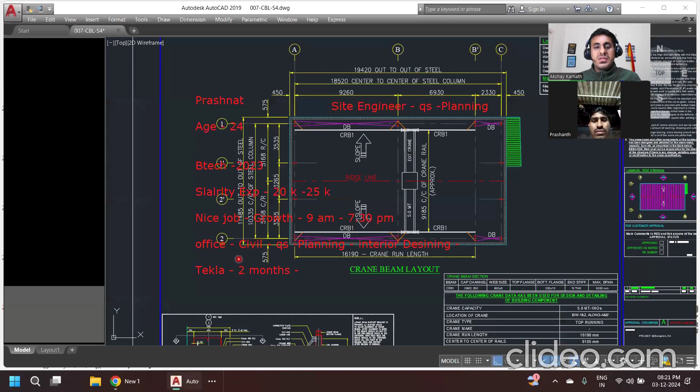Tekla job and all, what happens - there's a structural engineer, so what will happen? I'll tell you a simple idea, what they do in Tekla. Same thing I'll show you here, I'll remove all these things. It's a steel structure only. See, this kind of drawing a draftsman is going to prepare. Now for this particular drawing, how the model will look, how it will look in 3D, for that I'll show you here - Tekla.

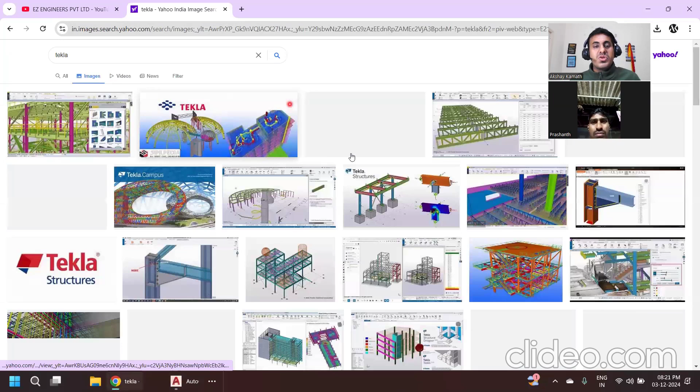So in Tekla, you're going to do such kind of models. You're getting my point? Yes sir, this kind of model you will be doing. But now, what should be the size of this pedestal? Let's say if this is the pedestal, what should be the size of the pedestal?

Then let's say if this is this thing, what do you call it? This is a flange, this is the top portion, we call it a flange. This middle portion is called the web. The bottom is called flange. Again, this is web, this is flange.

What should be the thickness of that? What is the length of this? All these things will be decided by the structural engineer. He will apply the engineering knowledge there.

If you are a modeler, he will give you an input. He will prepare such kind of drawings, rough drawing he'll prepare and give you. I'll show you one drawing, normal drawing I'm showing you. Let's say if you're working in any company, this structure engineer will prepare some rough sketch and give it to you like this. Now, being a modeler, you sit and do such kind of modeling jobs.

You will not decide whether I should provide an 8mm flange or whether I should put a 10mm flange. You will not decide, that is already decided by the structure engineer. But if you like such kind of jobs, if you're okay with this kind of job and happy doing such kind of modeling, you can enter this job.

There is scope also, because end of the day, for construction projects nowadays a lot of steel structures are happening, and nowadays people want these 3D models. In Tekla, we use all these things to do this. You can do that, it's a good job also, an office job.

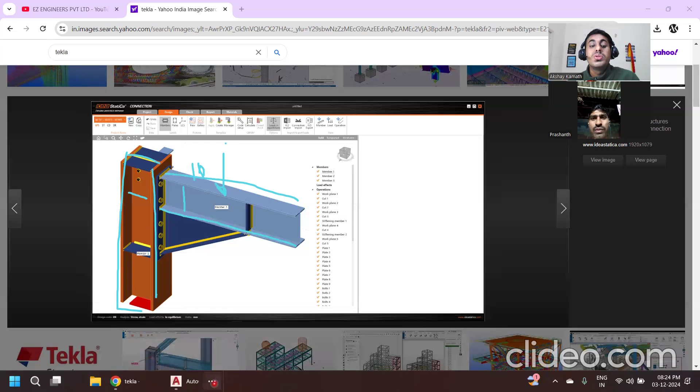Because what will happen, let's say you worked on the site for some time. I'm not telling you to work lifelong, but at least if you work for one year, tomorrow if you want to start your own consultancy, that knowledge will help you. You can help people prepare a plan, help people do the construction work, take the contracts, do the executions. That can be done. With a Tekla model, you cannot do that.

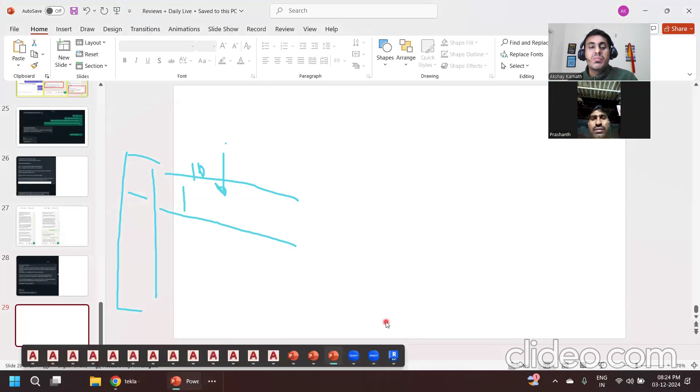In Tekla model, no. If you like, you're from which place? Telangana, you told? Telangana sir. So in Telangana, in your place, if somebody wants to do house construction, nobody requires Tekla for that. House construction, we are doing RCC. If you're doing RCC, you should know how to prepare such kind of plans, right? Simple, you should know how to prepare such kind of plans.

You don't do all this thing. For that, even AutoCAD is also sufficient. In AutoCAD, if you know how to prepare the plan, if you know Vastu layout, you can prepare such plans. And if you learn structure designing, you can do such kind of plans. You don't require any Tekla for that.

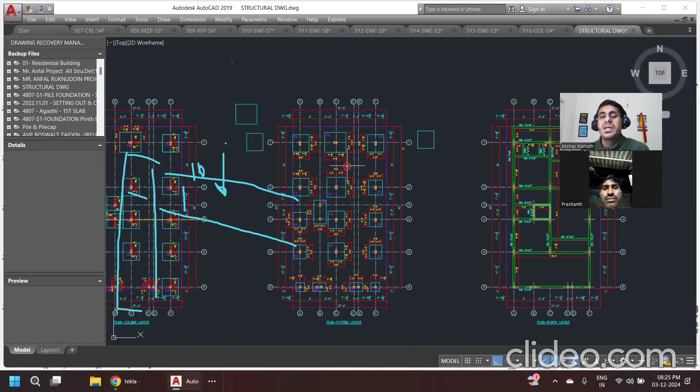Tekla is only required for steel structure work. What else do you know? So it's not required.

My suggestion would be to work as a site engineer in Hyderabad, Telangana. How far is Hyderabad for you? I can go, sir. If I need to work in Hyderabad, I'll go to Hyderabad.

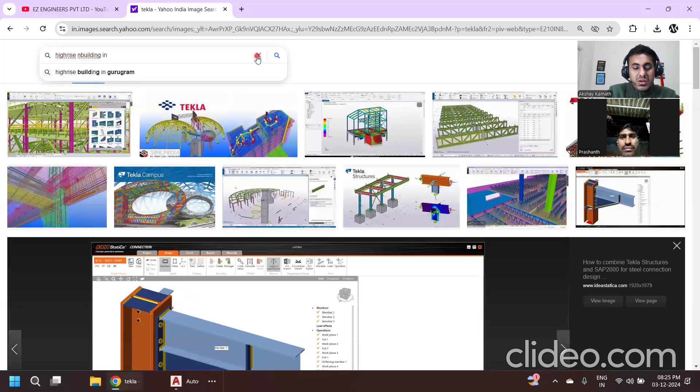I'll tell you, there's a podcast of mine in Hindi on the channel. There's a student who is 20 years of age, working in Hyderabad as a site engineer for a G+17 story building. There are a lot of high-rise buildings in Hyderabad.

He is getting 15,000, but you can get a salary of 20,000 also. Just imagine working on such a huge project as a site engineer.

But this requires 2 to 3 years, because to complete such a project, 2 to 3 years is required. You're still young, not like me at 30, 31. If I say a site job is hectic, it's okay, because I'm married, I have kids, I have to spend time with my family and all.

But since you're not married, at the age of 22, 23, 24, you can take risks in your life. Just imagine if you complete such projects for 2 to 3 years, the amount of knowledge you'll get - complete structure knowledge, mechanical, electrical, plumbing knowledge, interior knowledge, landscaping knowledge - every knowledge you're going to get.

Once you get all this knowledge, you can apply for abroad jobs as a site engineer. You can even get into a quantity surveying job. So these are the options you have. You can look for such jobs also.

That can be done. But my suggestion would be, in Tekla, you don't require all this engineering knowledge - it's not at all required in Tekla. If it's steel structure, a little bit of knowledge helps, and if you know to read the drawing, you can become a Tekla modeler.

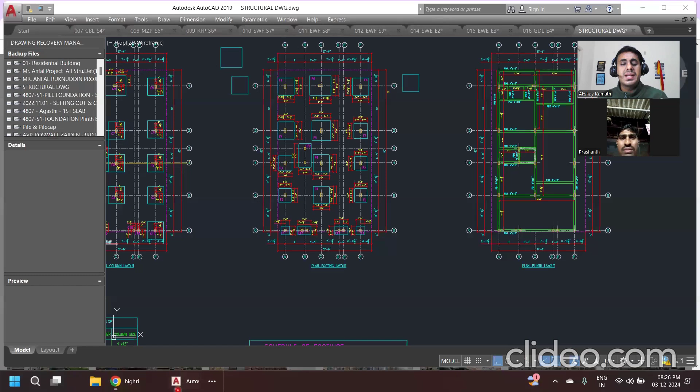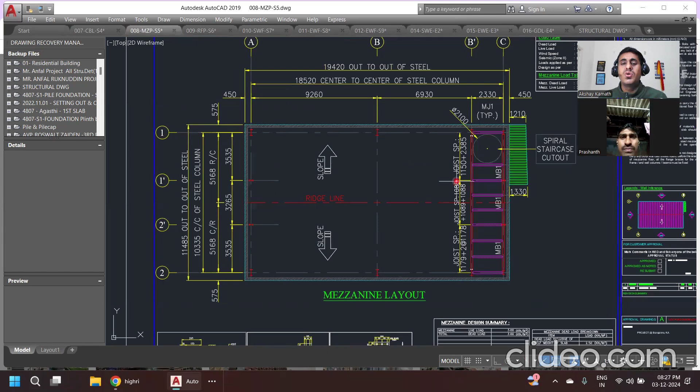But at the end of the day, you're doing modeling. You will never decide why these 4 bolts are given, why the spacing is 80, 60 - you will never decide all these things. It's already decided by the structure engineer. So the engineering knowledge doesn't come into this.

But if you work on site, your engineering knowledge is important here. You studied cement, concrete technology, BMCT, RCC subjects and all - everything is useful here. Work here for 1 or 2 years.

After that, you can go for a quantity surveying job, planning engineer job also - those things also can be done.

There's one podcast of mine - I think your video will come after some time, before your video one more video will come. There's a student who is 20 years of age, he also had the same problem. He's working as a site engineer. You watch that podcast - next week that video will come, after that your video will come.

In that, I've told him how, suppose he's working on such a big project - what happens when we become a site engineer? What do we do? We just look after the civil work only. We never think about how the mechanical, electrical, plumbing works are done.

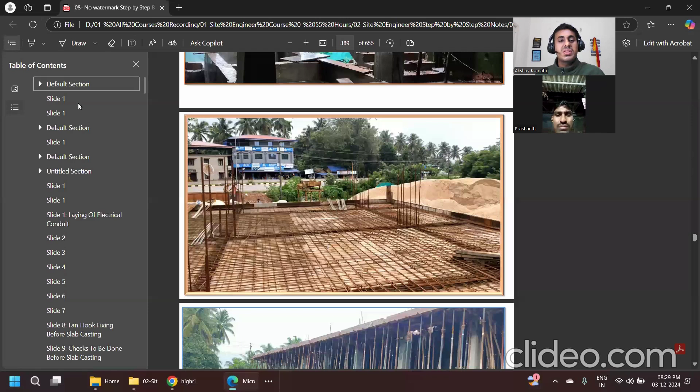In the same way, if any work is going on - for example, I'll tell you in 1 minute - when you're working as a site engineer, what happens? We usually focus on the completion of a particular slab.

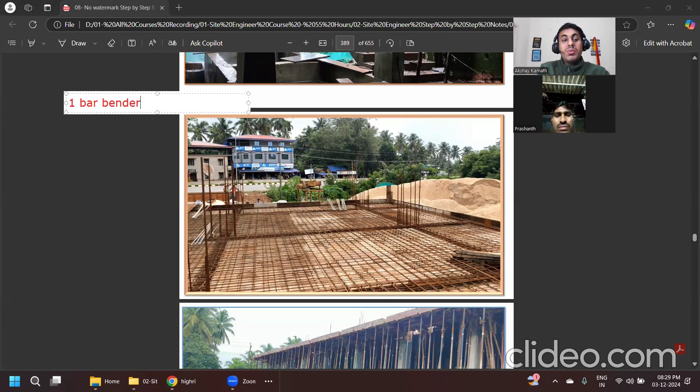But along with that, if you try to understand - if I put one mason, one barbender and one helper, how much work do they do? These things I'll explain. If you note down all this, you learn the productivity also.

Once you learn the productivity, tomorrow you can even go for planning jobs also. Here you can see all the applications.

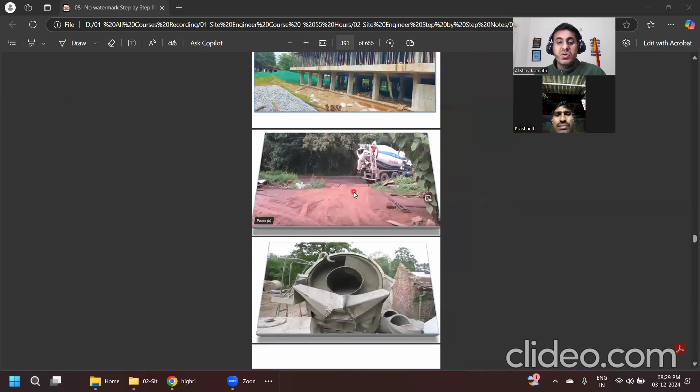I'll tell you what is the application of engineering. You studied one-way slab and two-way slab, no? Yes, in college you studied one-way slab, two-way slab and all, no? Yes sir, yes sir. See, all those are the application of this.

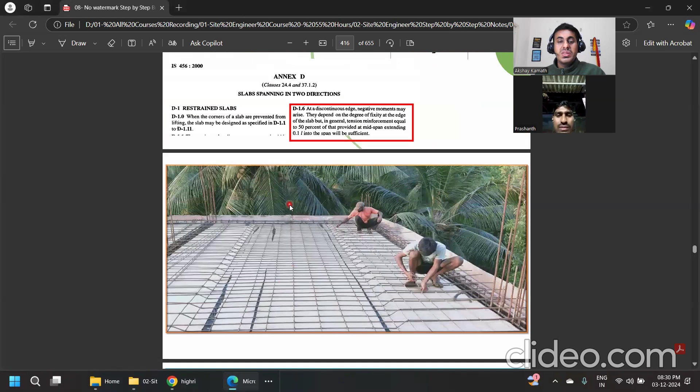Now I'll show one small application here. So what is the application of engineering? You studied that this is your fixed support - here it will be fixed. So when the load comes, this slab will try to lift from this side, then it will go down here. Wait, I'll take a different color.

This slab will try to lift from here, and it will try to go down here. Again, it will try to lift here. So you have a negative bending moment here, a negative bending moment here, and a positive bending moment here. Since you have a negative bending moment, your slab is trying to lift. That is why we provide this kind of bar, called a crank bar.

So you studied this in engineering, and you are putting the application of that. Just imagine if you learn all these things and try to implement them on site, you can become a good site engineer. You can go for planning engineer jobs and all.

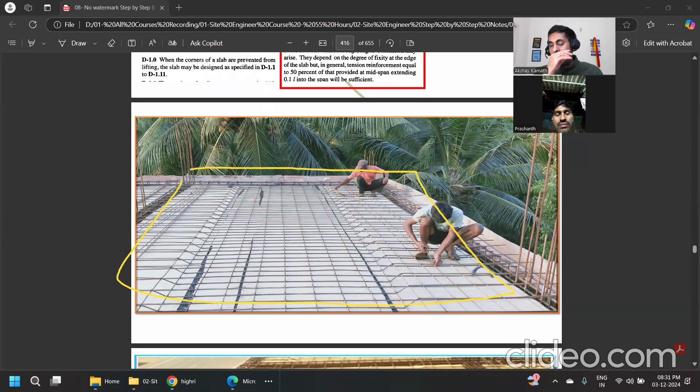But unfortunately, people think that being a site engineer means just standing near the slabs, watching how the work is done, and then complaining that the whole day they're speaking only with laborers. That is not the role of a site engineer. But if you think in this direction—how much steel is being put for two guys, how much steel has been put for the entire slab—and try to understand all these things, you can become a better engineer. But unfortunately, we are not learning those things.

In the same way, I'll tell you one more example. Let's say you're working on the site. Okay, this is the entire plan, and this is the layout of this thing.

If you're working on the site, we'll never think about this. Tell me, in this entire column layout, which column will get the maximum load? The column which is at the center will get the maximum load. What is the reason? Very simple. Because on this column, half of this slab load will come, half of this slab load will come. Let's say if there is a slab here, half of the slab load from here and half of the slab load will come. This entire area's load will come on this particular column.

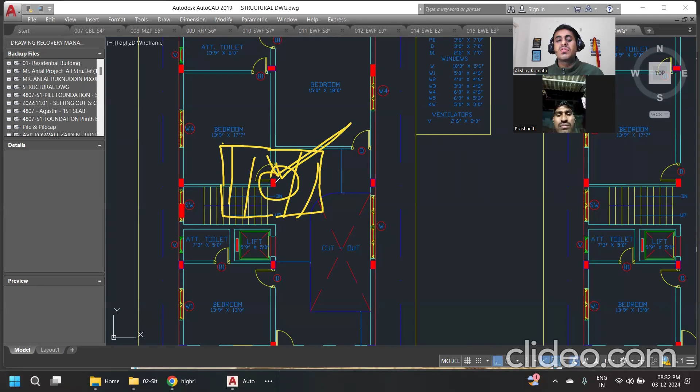So being a site engineer, even before I check the drawing, I know that the reinforcement and size of the column will be more here. And practically, if you try to correlate, you can see the same thing in the drawing also. If I open the column drawing, you'll see this particular column will have a bigger size only. Got it? You should think in this direction. This is a quality of a site engineer.

But if you don't think in this direction, what will happen? You just say, sir, footing is there, sir, column is there, C1, C2, C3 column, 9 by 9, 9 by 12, 9 by 15. This is what we do.

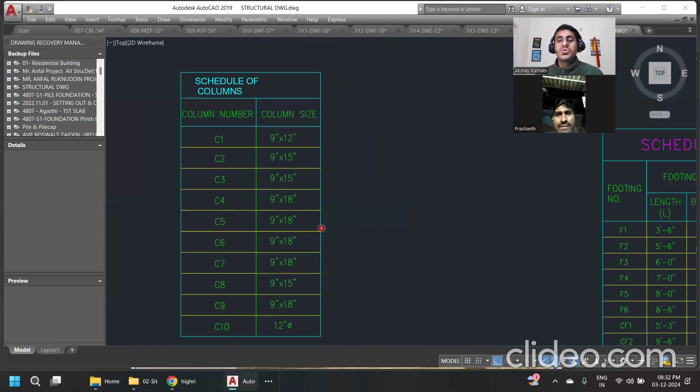So if you learn all these things and implement them, first you work as a site engineer, then go for a quantity surveyor field, go for a planning engineer field and all. That also can be done. Apart from that, you can even go for a BIM field. BIM field is also good, but again, the same thing—engineering knowledge is not required there. But if you like 3D modeling and tools like Tekla, if you like such kinds of jobs, you can go for it, no problem.

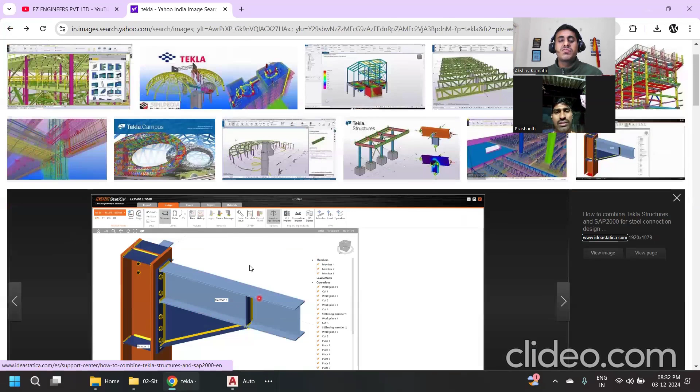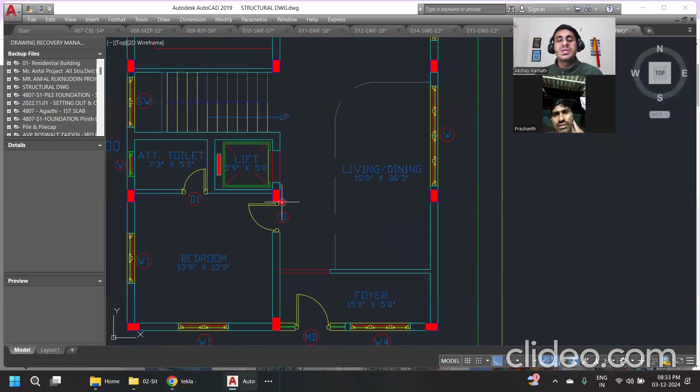But after doing this job, if you say you want to start your own consultancy, and somebody comes to you saying, Prashant, this is the plan I have, tell me whether the column sizes they put are correct or not—what will you do? You cannot answer, because you're not working in that field. You are a Tekla modeler. You will not know whether the column size should be like this or not, whether the column should be oriented vertically or horizontally. You don't know the typical column sizes for residential buildings and all. If you want this kind of knowledge, it's better to work on site than go for QS, planning and all.

But if you don't want such kind of knowledge, go for this job, no problem. Okay sir, a few days back I attended something.

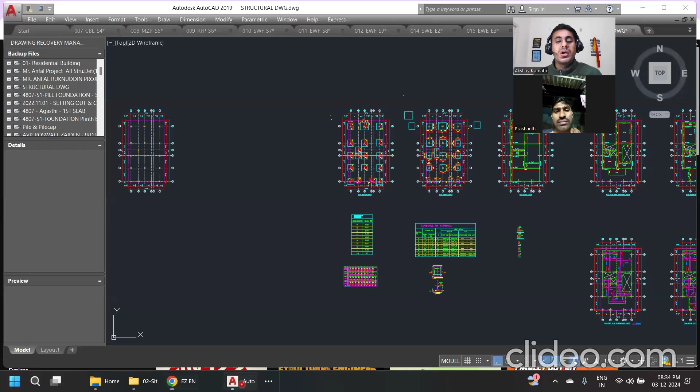People who are working as AutoCAD draftsmen and all, if they want to go for a better position, if they learn Tekla, if they learn BIM and all, that will be more helpful to them. That will be better. But for someone, even if you're working as a Tekla modeler, if you don't know to read such drawings and all, what will modeling do? Simple, no?

Correct, sir. If you're working as a Tekla modeler, this course is there. No, this is my course on steel structure. I have a course on PEB also, pre-engineered building. So if you work on the site for 1 year, I'll tell you one good way of getting into Tekla. You can enter into Tekla.

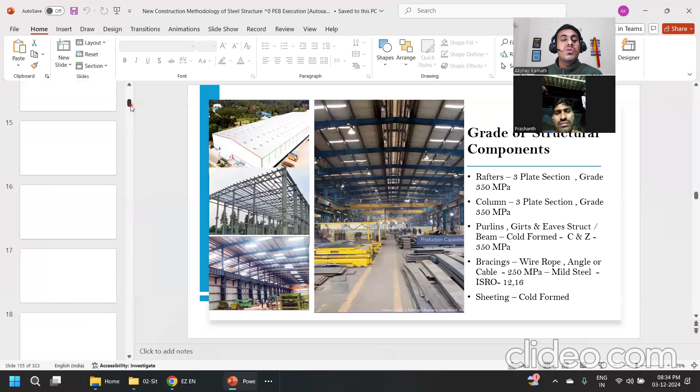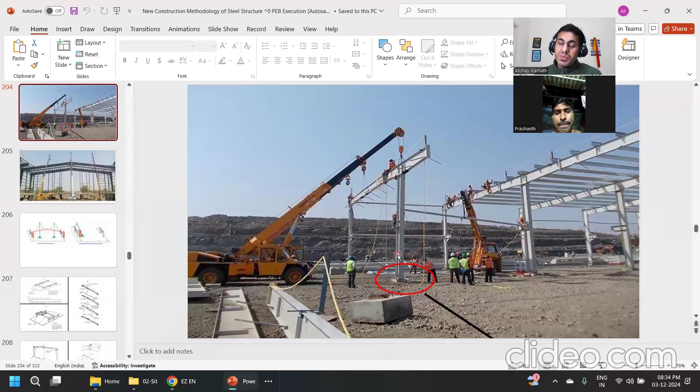Let's say you worked for 1 year as a PEB engineer on the site. You learned how to do the entire execution of these pre-engineered buildings and such kind of buildings, and you'll do in Tekla modeling. All these are your steel structure. Then if we enter into the Tekla field, okay, you do. That is also a good option, no problem.

Because sometimes if you get frustrated towards a site job, then you have an option of QS planning and all. If you don't want that either, you enter into the modeling field, it's okay, I don't have problem. That is a good field because I already worked as a site engineer. A good site engineer, if he learns the modeling part and all, he can become a good modeler. He can lead a team also tomorrow.

That also can be done. Yes sir. Okay, that way you can plan. But if you want Tekla, you learn it. But that training institute is of no use, paying them 30,000 rupees as commission and all is of no use. Nonsense it is.

So you have taken my construction methodology course, no? Yes sir. Okay fine, you finished that. Apart from that, there are other courses in my app. You can download my Civil Brains app. In December, we are running an offer, instead of 8,000, we'll be giving it for around 7,000, somewhere close to 6,999.

From December 15, I'll run the offer here only for the first 100 students. If you're interested, not just this course, you go and decide what you want to do, based on that I'll tell you. Because if you want to start your own consultancy and all, then this will not help you too much, then you have to learn AutoCAD and all. But tomorrow, if you want to work as a site engineer and then become a QS planning and all, then this is good. If you have any aim or plan of working abroad?

No sir, no, you don't have. Then you don't have to learn this MS Project, Primavera and all. But if you're going for a planning job, you should learn. Otherwise it's not required.

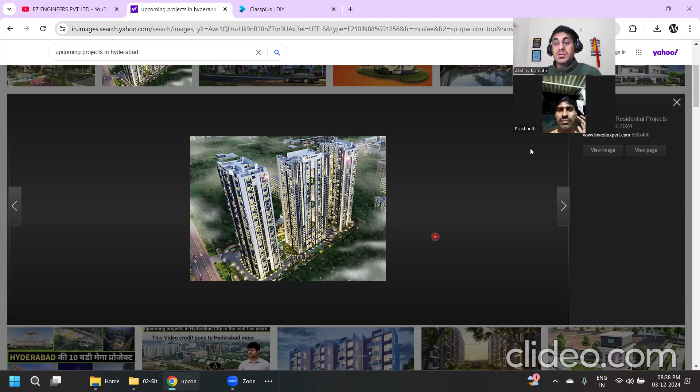And MIVAN is something which is booming nowadays. MIVAN shuttering. Whatever I'm teaching is the frame structure. In my same course, in future after February, I'll add MIVAN also in this.

So MIVAN also, if you learn, you have good opportunities in MIVAN construction. Very few engineers are there in MIVAN. You can go for all these MIVAN constructions only. Upcoming projects in Hyderabad, if I put MIVAN, this is MIVAN technology. MIVAN means MIVAN technology, we're using those. All these are your MIVAN.

You can work, but it won't be an easy job. That's what I'm telling. Site execution job will not be an easy job, but someone who has gone through that hardship will have a better future.

Then you should go towards quantity surveying, planning jobs. You improve your communication skills, you can go to some better positions also. And then you are in contact with the civil field only - I mean civil means you are not doing modeling kind of jobs. You feel like you are actually doing good jobs. That way, initially it is hard, but with time, it will change.

You have to change. The problem with people - a few days back, I spoke to a student. He's having 5 years of experience and earning only 20,000 rupees. So I asked him why you're earning only 20,000 in 5 years. He told me, I got one job and I stayed in that job only. They never upgraded their knowledge, they never changed their company.

Everybody wants a comfort zone. So what will happen? There won't be any upgrade, that is the problem. So these are the options which you have.

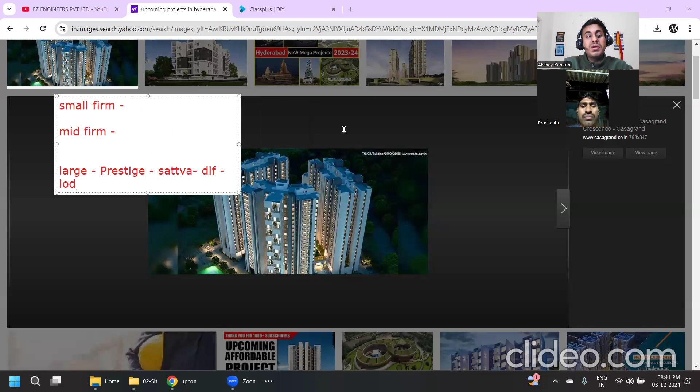These are another thing we have: small, mid and large. Large companies are something like Prestige, Salarpuria Sattva, DLF, Lodha Company. All these are the big firms. There you have a good life, good salary and all. And all these are the real estate sector I'm speaking of.

Here you have money, but to reach there, you should have knowledge also. You should upgrade your knowledge. You should work on such projects and all. Then it will take effort. You have to give your efforts, you have to learn and all. But if I tell somebody to enroll in the course and learn, they don't want to spend like 7,000, 8,000 rupees.

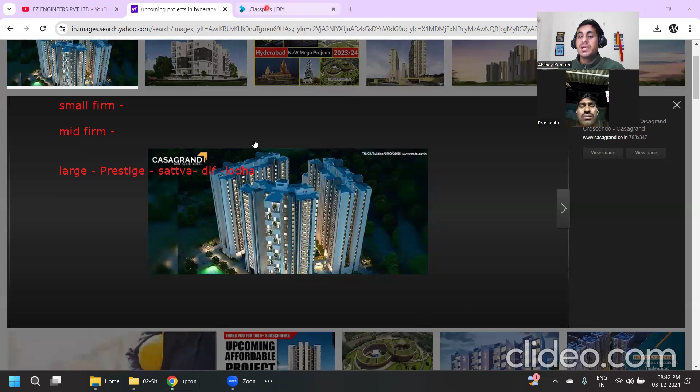They want everything for free. They expect that everything we get in YouTube, then they run behind these YouTube videos. There you don't get it, and then you'll waste your time 5 months, 6 months, 8 months, 9 months.

If you just spend some money and learn, definitely you'll have a better position. You go to better positions also. Because investment you have to do on yourself. The more investment you do on yourself, the more you'll learn and you can go to better positions. But unfortunately, people don't want to spend the money. They're ready to spend 15, 20, 25, 30,000 on a mobile, but they don't want to upgrade with courses. Definitely that will lag.

That's it. Okay, Tekla, I would not suggest. Yes, tell me. I got it sir, about Tekla I won't join, sir. But if you're working somewhere in the steel structure, and you had asked me, sir, should I move to Tekla, I would have told, okay, at least move. But Tekla is completely a steel structure.

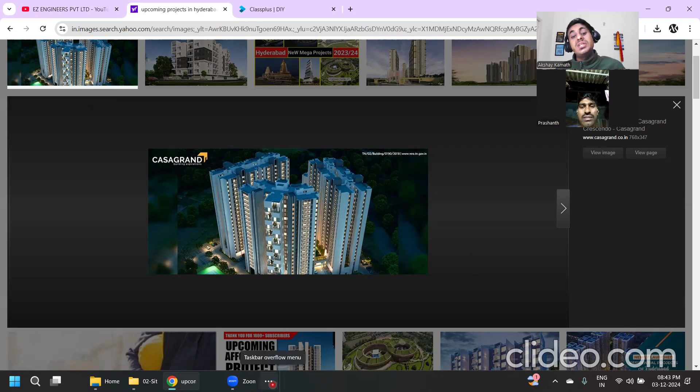You don't have an idea also, you don't even, frankly speaking. No, it's not like that. For a project to complete, we want everyone's input. There, you will not do any engineering, you'll do the modeling, but before doing modeling, yes.

But everyone can do the Tekla job, it's a 2 months, 3 months course. You can do it, and usually diploma people, draftsmen and all, they go into such kind of jobs. Now, in your case, you haven't seen RCC construction properly.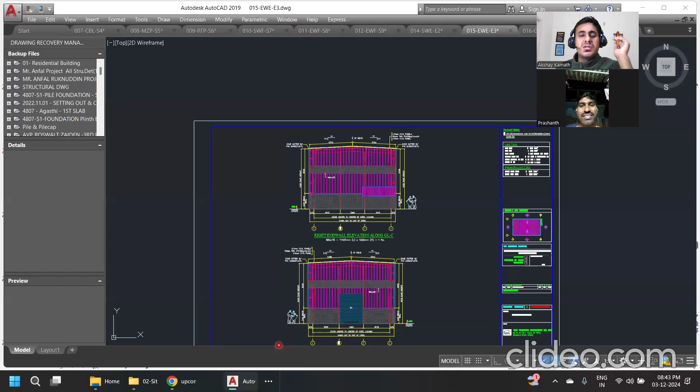That Tekla is a steel model. Have you ever seen such kind of construction? You haven't seen it, no. Tomorrow they'll directly give you a drawing something like this, and ask you to do the model. You don't know what is plan bracing. This is called as plan bracings.

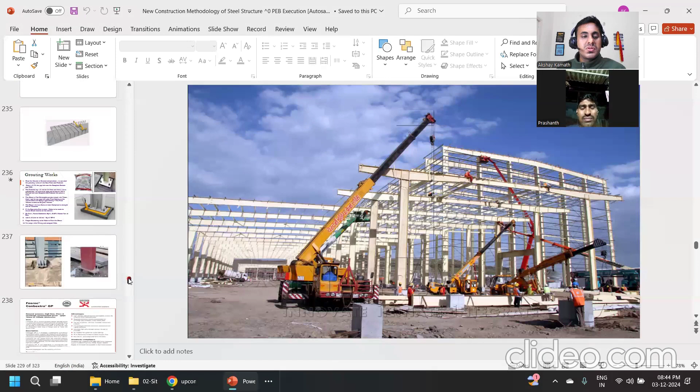I'll show you, where is that? I have a course on PEB also. Okay, so these are called as your base plate, these are your bolts, these are the stiffeners. If you haven't seen all these things, what model will you do? At least something should come in your mind to do the modeling.

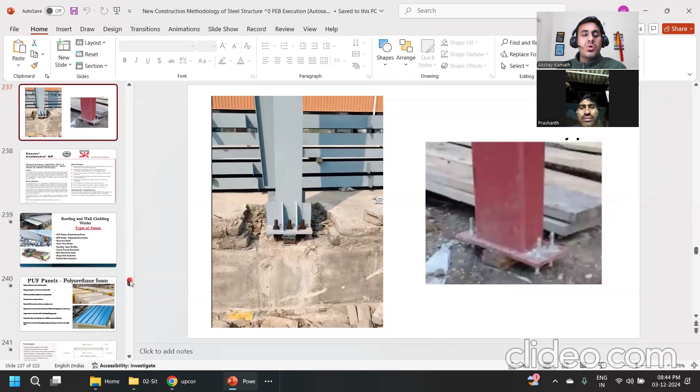Yes sir. If you haven't seen - these are called as your rafter, these are the connection plates what we give, these are again stiffeners. So if you haven't seen the construction of the steel only, what kind of modeling are you going to do? Nothing. You will keep on asking your senior, so what is this? What is this? All the time.

Understood. But if you had worked on steel structure, let's say, if you had asked me, sir, should I go for Tekla, I would have told, okay, if you don't like that site job and all, think of going for Tekla. Then you can become a good Tekla engineer because you know the execution part. You know what is stiffener, you know what is flange, you know what is web, you know what is bracings, you know what is mezzanine floor and all. You have knowledge, you have worked on site.

Now, if you become a Tekla engineer, you will have a weightage. You can lead a team also because you have already worked on site. If somebody comes and gives you such a drawing, you'll know, okay, this is a drawing already. I'll show you one drawing.

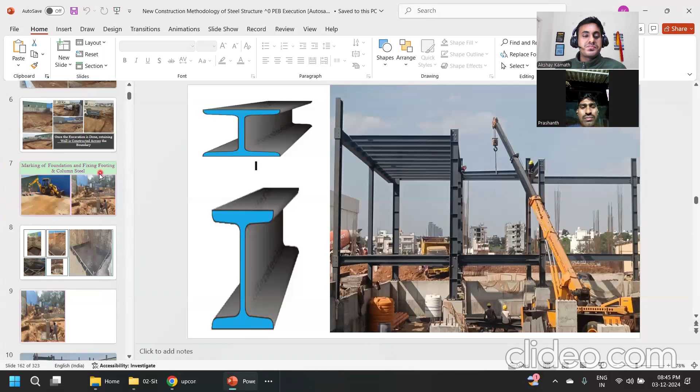Now tell, if somebody gives you a drawing, can you read this drawing? Do you even understand this drawing? You don't know anything. Seriously, no? But if you have worked on site, then you understand, sir. Nothing sir, it's very simple.

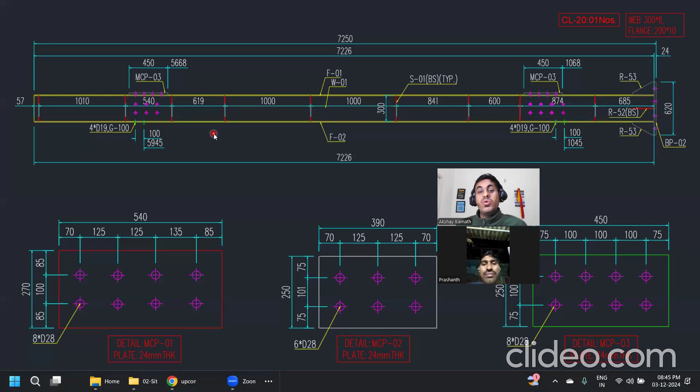You only would have explained me now. When you join those training institutes, they'll never teach you all these things. They directly give you a drawing and tell you this is what you are supposed to do. What you'll be doing is a kind of modeling job. After some days you will feel, sir, what kind of job am I doing, sir? Nothing, I'm just doing modeling, this is not what I wanted. Whatever I learned in engineering, nothing is useful.

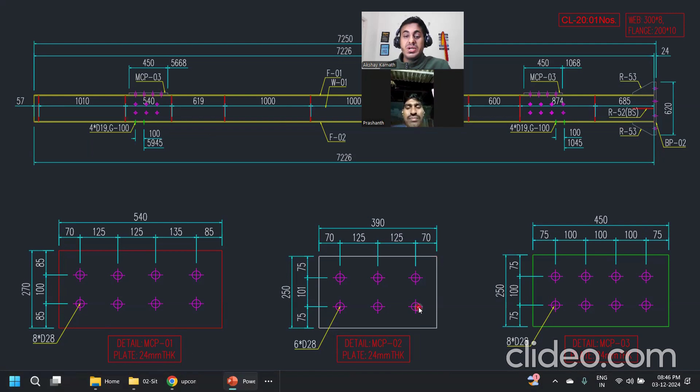It is useful, everything is useful in engineering. In engineering you learn to design all these bolts and all in steel structure. You learned tension member, compression member, everything. But the person who is going to teach you has to teach you in that direction. But if he is a modeler, what engineering will he teach you? A modeler cannot teach you that. Only a structural engineer can teach you. Sir, that's how it is.

Okay, so that way you plan. Sir, one more question, sir. Yeah, ask. Sir, how much time will it take to earn like 30K, 40K? 30K, 40K, if you're working in a very good company, 2 to 3 years, I'll give proof only.

If I tell orally, people will comment, what is this guy telling. Because people want proof, no. So without proof, that is why I keep all this proof only. Okay, I'll give you some proof. See, site job, it is hectic also, it will take time. Okay, I'll tell you.

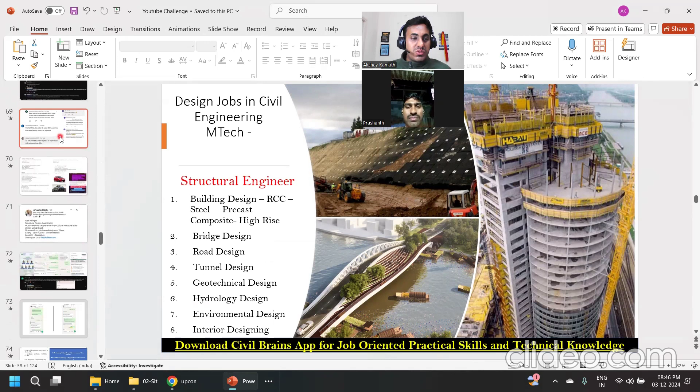I'll show you a few reviews from people only. He is one of my students, Salim, sir. He has 2 years of site experience. He got an offer of 42,000 rupees per month plus accommodation in Mumbai.

He is one of my students, Satyam. He has around 2 years of experience working in the water sector. He is getting a salary of 35,000.

This is one vacancy which had come, just see what they have written. They want someone who should be a resident civil engineer, site engineer. When you have 12 years of experience, you are not a site engineer anymore. You should know project management, you should know building, you should know BOQ reading, you should know contract tender. See what salary they are ready to pay? 3 lakh rupees. But that is for 12-year experience, okay?

He's another student, he started with 18K salary. After 1.5 years of experience, he's getting 45K in hand plus accommodation plus food.

He's one of my students, he got this from college placement only, when he did from Jamia Millia something. At that time he was getting 40K salary as a fresher. After 2.5 years of experience, he's getting 75K. I saved his name as 75K only. So after 2.5 years experience, he's getting 75K.

He's working in some water treatment plant. Okay, so these are the proofs. You get everything, only the thing is how much ready you are to work, how much ready you are to come out of your comfort zone. That is all that matters.

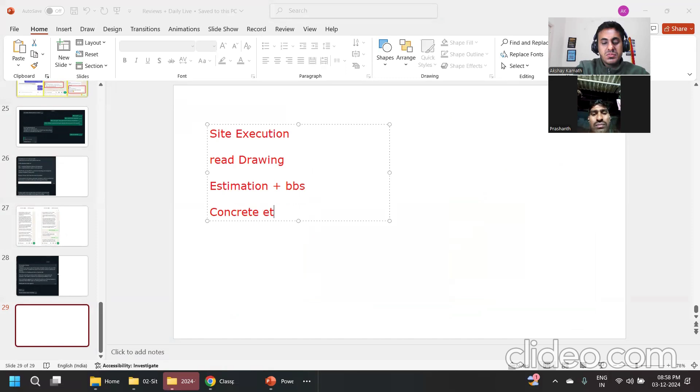You should have knowledge about site execution from start to end. You should know how to read drawings, how to do estimation plus BBS, and have some knowledge about concrete technology. You should know a little about code books, basic things about IS 456. And if you have skills in MS Excel, that is sufficient - other than that, no software is required if you're applying for a site execution job.

Even AutoCAD - if you don't know it, it's okay, because at site you'll not use AutoCAD since the drawings are already prepared. But you should be good in MS Excel, because you have to fill the DPR, daily progress report, and sometimes small presentations in MS Word. If you have this much skill, you can get a job anywhere in the initial stage.

The course which you took covers only this part - site execution. Their drawing reading, I've told a little, but my drawing reading course itself is 30 hours. This course you took is a 60 hour course - on Udemy it's 45 hours, but in my app I'm adding another advanced course of 15 hours, making it 60 hours. Drawing reading itself is 30 hours of content, and I've added more than 20 plus structural drawings.

Estimation and BBS is 55 hours of content, concrete technology is 20 hours, and MS Excel is around 15 hours. So if you finish all this, definitely you can get a job anywhere on this planet - that much guarantee I'll give you. That is covered in my 6-in-1 combo course.

But in this Construction Manager Mastery course, along with that, I'll be teaching you basic project planning, because tomorrow if you want to become a planning engineer, you should have basic knowledge of project planning - that's also covered. You can see site execution is covered, and advanced site engineer content too - brickwork, blockwork, plastering, painting, and before that the sequence of construction. You're watching all these lectures.

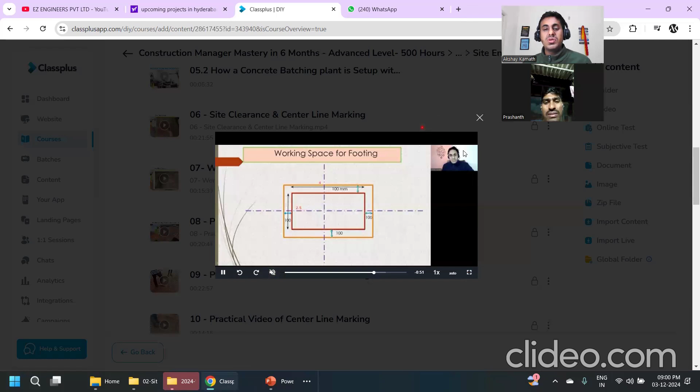So centerline layout and all, are you able to understand? Yes sir, centerline I have watched. Okay, centerline I'll make a different code and re-upload all these things. I'm working on an apartment construction. Apartment construction also I'll add.

Okay, fine. So in site execution we'll cover that. After site execution also, you'll come and watch this thing. Advanced site engineering is not required, but you can watch it.

Drawing reading is a very important course. I've covered more than 20 plus drawings, G+3 residential building, right from how to read the drawing, column, beam, slab, staircase, brick - everything I've covered here in this course.

G+3 residential, then structure designing concepts is covered. Then G+2 residential building, G+1 commercial building, hostel building - structure engineering concepts is covered. Then industrial building is covered. Interior and plumbing drawing is covered.

Basement plus ground plus 3 commercial building is covered. Airport drawing is covered, high-rise building drawing is covered. In high-rise building, I've taken a very good thermal power plant drawing with high-rise beam layouts. High-rise building and flat slab drawing is covered. Couplers, lift wall - all these things is covered.

So if you learn all these things, definitely whatever they ask in the interview, you will be in a position to answer it, no problem at all. That much confidence you can have on me and on my courses, that much guarantee also I'll give you. But I want time - 15, 20 days I cannot make you engineer. Minimum 2-3 months is required.

Yes sir, 2 to 3 months if you can spend - here quantity estimation, BBS is covered, BOQ estimation is covered, then interview preparation I have covered, then concrete technology is covered. Then additional thing is basic project planning and MS project you will get, and here you'll get steel structure - that steel structure what you asked, that is also covered. But initially steel structure not required.

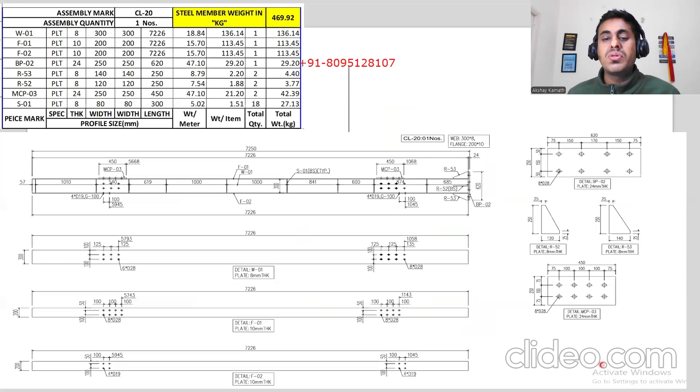Frankly speaking, just imagine - somebody doing Tekla has to know these kinds of things. But somebody who hasn't worked, who doesn't even know RCC construction, what modeling is he going to do? Do you even think he'll be in a position to do such kind of modeling? He doesn't even know how to read such drawings - these are steel drawings.

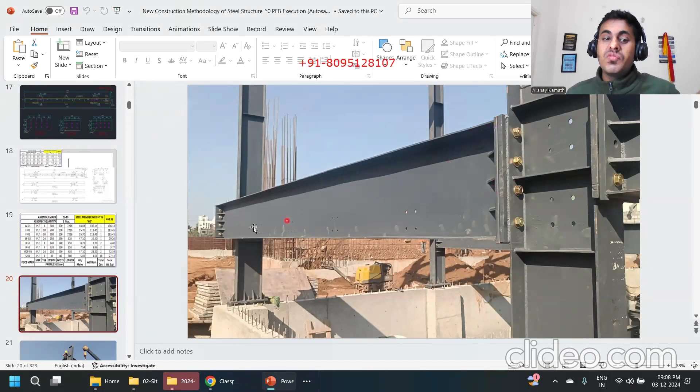Steel drawings are a little difficult to understand. RCC itself we find difficult to learn, and in Tekla you're going to do such kind of modeling. He doesn't even know what a base plate is and what modeling he'll do. If you haven't seen such things on site, what model will you do? You're just completely blank, right?

So that is why whenever you want to do something, just think what you want to do. I did not even sell him. I don't have a Tekla course. I didn't sell him anything. I told him, if you want to enroll, go ahead. But at least he got clarity in his life about what he wanted to do, and later he'll decide.

But somebody who wants to start his own consultancy doesn't require to learn Tekla. But what happens? You go and join certain institutes, spending money just for the sake of it, and he did the IT course also. There also he did not get anything. The IT people also charged him some 50,000 or 60,000, I don't remember now. First they told him they would help with placement, then they did not help him.

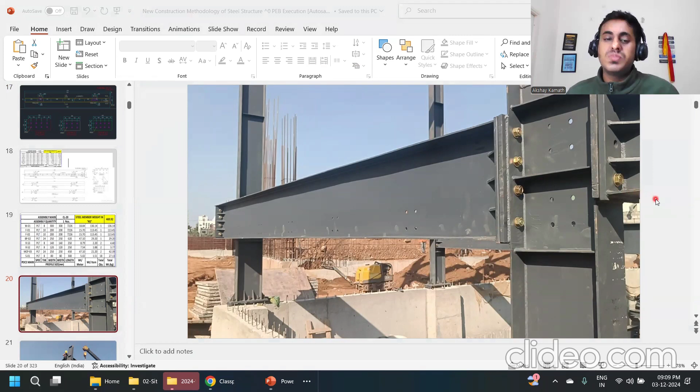So 50,000 is not a small amount. 50,000 has value. To earn 50,000 rupees, if you're getting a salary of 20,000 per month, you have to work for 2.5 months.

That is why when I do counseling, for me it's not about just selling the course. Selling courses, I sell hundreds every month. But the input I'm giving him will help him lead a better life. Only when I mentor someone and it changes his life, if he can have a better life, that itself is an achievement for me. Money I'm anyhow earning, that's a different thing. But if I can guide him in a better direction, he'll definitely have a better future. That is the main intention of doing this mentoring session.

I used to do this over a call, but if I do it over the call, only he will be able to understand, other people will not. So that is why I'm doing it this way.

For other people who want to enroll in a course, check out my content. If you feel I'm the right person to guide you, you can enroll. Otherwise, if you want some other course, tell me, I know other institutes too. If someone wants to learn Tekla only, I can suggest a training institute. For BIM only, I can suggest a better institute. I know people in the market who at least give placement assistance - nobody gives placement guarantee, only assistance. For interior design or structure designing, I can help you out too.

Somebody working on site with 2 to 3 years of experience who wants to become a planning engineer - I don't have that course, I won't teach to that level, but I'll suggest another course. At the end of it, you should have money. Nothing can be done for free. This course, from my side, I can reduce the price and give it to you. But other institutes charge 10,000, 15,000, 40,000, 50,000. So only if you have money should you enroll in a course.